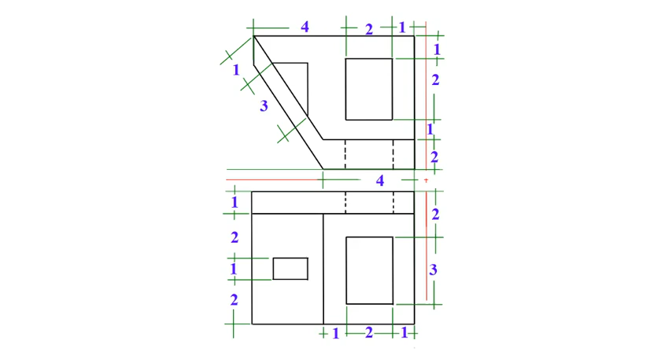Welcome back, class. Today, I'll show you exactly how to take a set of orthographic views and convert them into a 3D isometric drawing. We'll use a box method with coordinate transfer, a clear, step-by-step process that works for any object, simple or complex. By the end, you'll see how each 2D view contributes to building a complete 3D visualization.

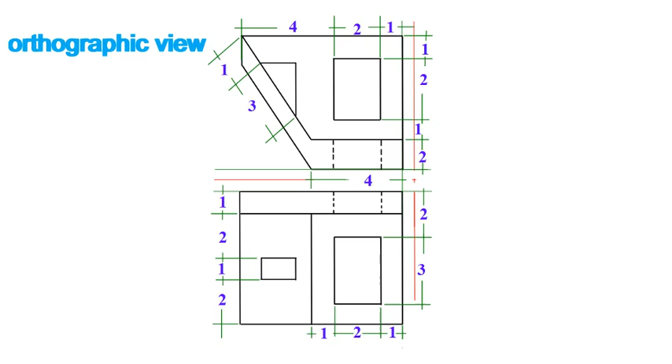When we begin the process of converting orthographic views into an isometric drawing, the very first step is to carefully study the given views. Remember, orthographic drawings are like a map. They provide us with all the information we need to construct a three-dimensional object, but in a flat, two-dimensional form. The front view gives us the height and the width, and it often shows us the slopes or inclinations of the surfaces. The top view gives us the length, depth, and the width. These two views together contain enough information to let us imagine the full 3D shape.

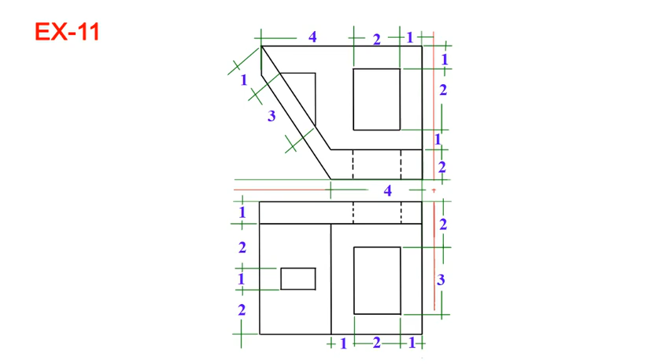In many cases, a third view, like the side view, might also be included, but for our particular example, the front and top views are sufficient. We do not need the third view, because the dimensions are already fully defined.

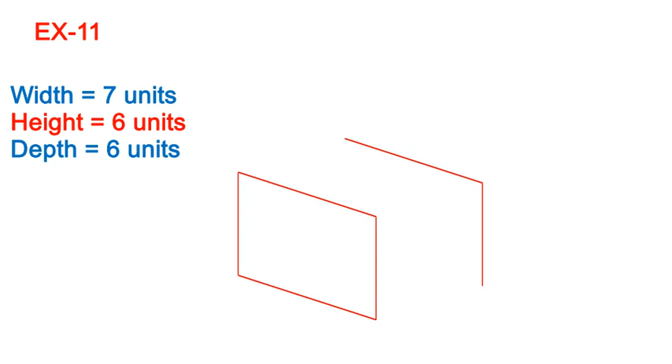In our case, the box dimensions are: width equals 7 units, height equals 6 units, depth, or length, equals 6 units. By drawing this box in isometric view, we set the limits for the object. Every other line and feature of the model will fall inside this box, so once the box is correctly drawn, the rest of the drawing becomes much easier.

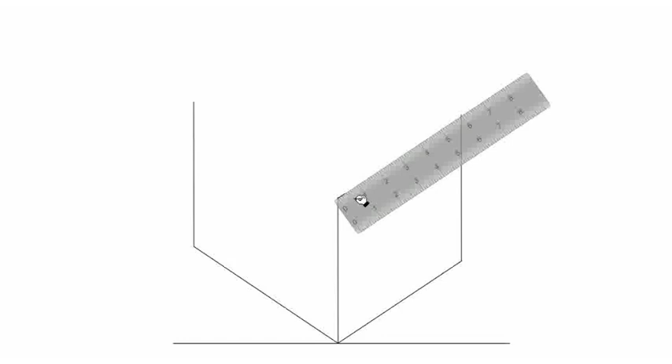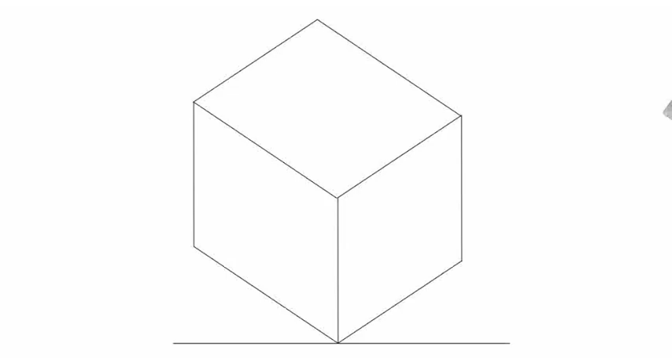A vertical line for height, a right-hand line at 30 degrees for length or depth, and a left-hand line at 30 degrees for width, since this side faces us. Every measurement will be projected along one of these three directions. This gives us the illusion of 3D on paper.

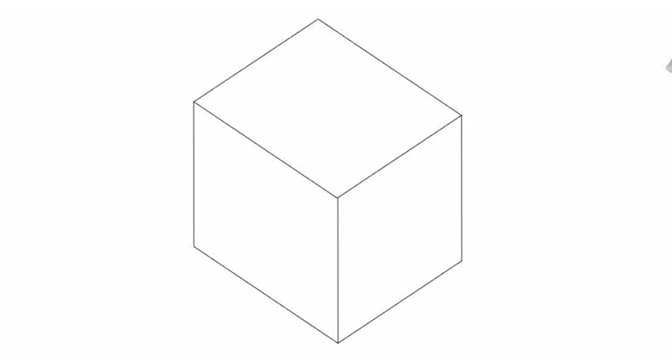Let's carefully build the object inside the box, step by step. We always start by looking at the orthographic views, because they tell us exactly how high, wide, and deep each part is. Begin with the top and front view. In this view, we see a base rectangle measuring 2 units by 5 units. Next to it, on the side, there is another rectangle measuring 1 unit in width by 6 units in height. These two shapes form the foundation of our model.

Create the base first. Draw the 2 times 5 rectangle and the 1 times 6 rectangle side by side in the right side view before extrusion.

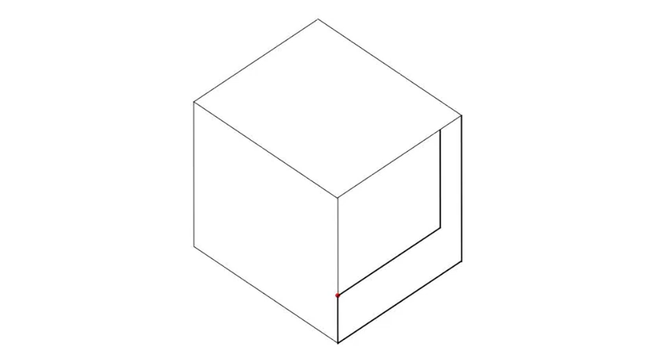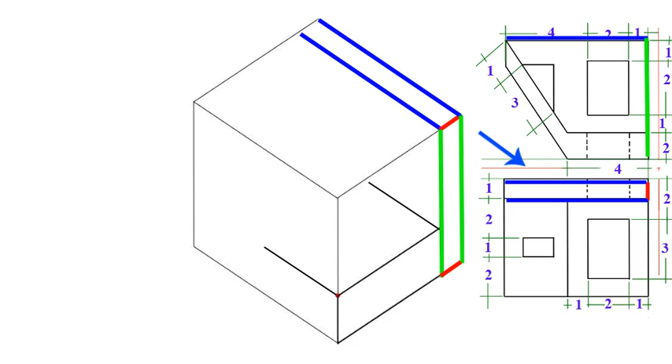Extrude the shapes according to the top view. The 2 times 5 rectangle is extruded to a depth of 4 units. The 1 times 6 rectangle is extruded all the way to the end, as shown in the top view. By comparing the front and top views together, we know exactly how far each portion should extend. This way, we gradually carve the object inside the box, starting from the lower block and then building the step at the back.

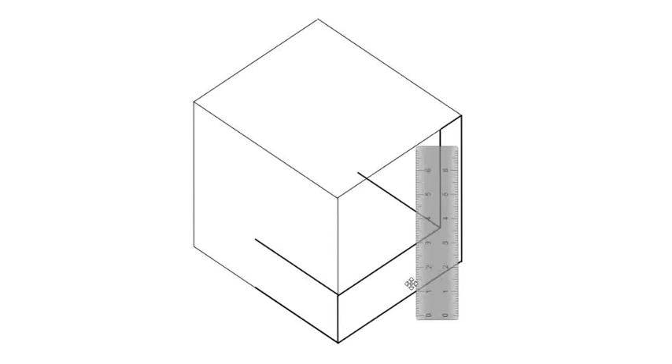To construct the slope, first pay attention to its endpoints. From the front view, the slope begins at a depth of 7 units measured from the right side view, which places it on the left edge of the front view. From there, the slope line drops down until it meets the upper left corner of the 4 times 2 rectangle that appears in the front view.

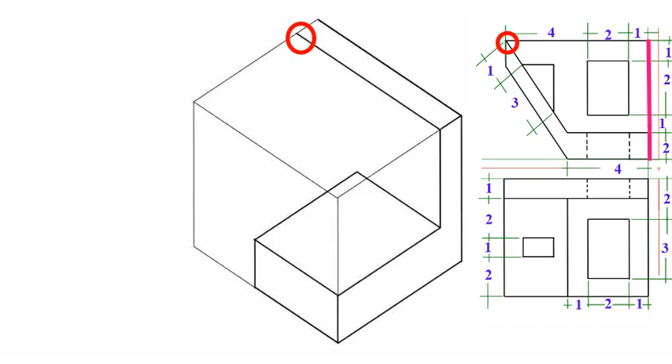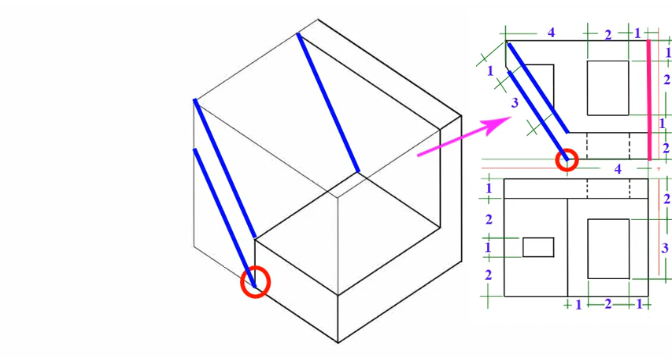The opposite boundary of this sloping surface is less direct. Its lower edge starts from the bottom corner of the same 4 times 2 rectangle and then rises upward, as we can clearly see in the front view. The extrusion length of this sloping plate is not determined in the front view. It must be taken from the top view. Once you read that depth from the top view, you can extend the slope backward. With these references, sketch.

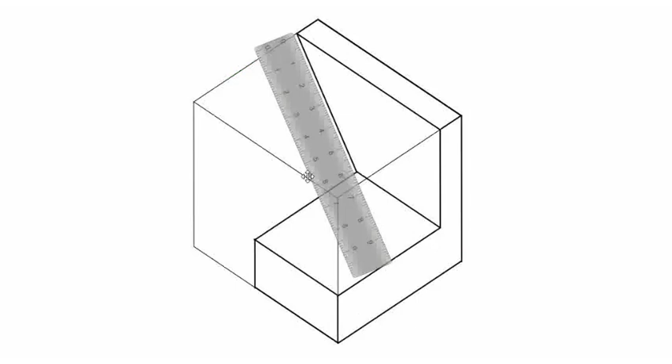The sloping surface according to the given information, carefully linking the front and top views so that the 3D form is accurate. Next step, adding the square holes correctly. Adding the 1 square and 1 rectangle hole.

1 rectangle hole on the top surface of the base plate, and another square hole on the front face of the plate. Remember, in isometric drawing, every line from the orthographic views is directly transferred onto the isometric planes. This is why we carefully measure from the given orthographic views before we draw anything.

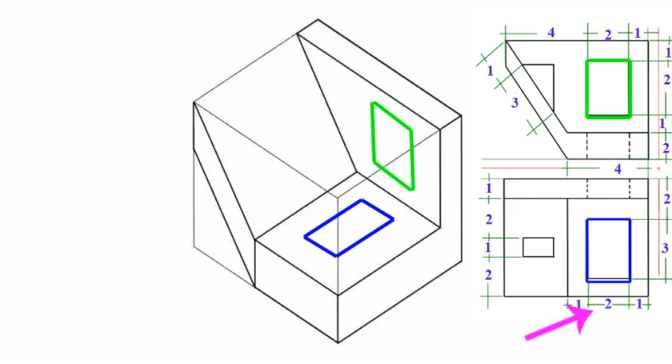The orthographic drawing tells us the hole on the top surface of the base plate is a 3 unit by 2 unit rectangle from the top view, and it's 2 units depth from the front side view. To construct this hole in isometric view: first, the hole is at the center of its square, so you must measure 1 unit to the right from the front side plane, and mark it slightly.

And measure 1 unit to the left from the right side plane. Always keep your construction lines light. Only darken the final visible edges of the hole after confirming its location. This completes the hole on the top surface.

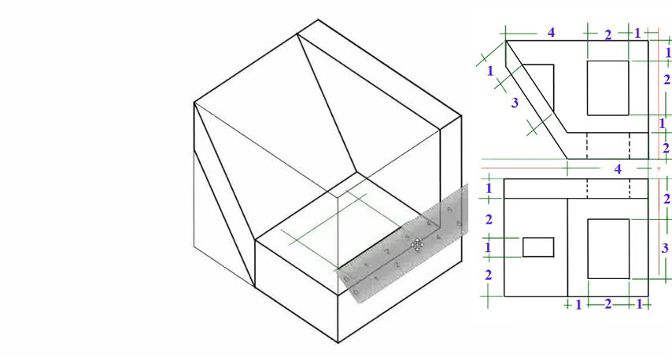Drop vertical lines downward to represent the depth of the hole. The depth from the front view is given as 2 units.

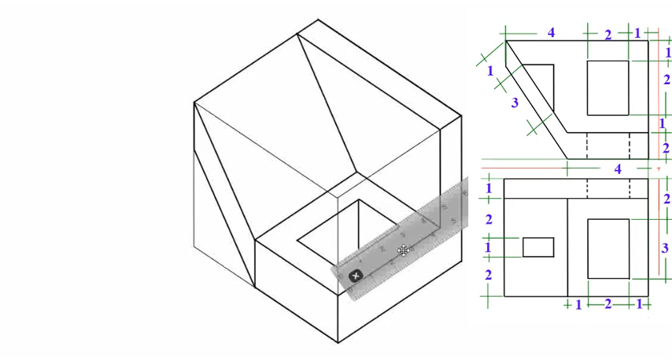Let's work on the hole in the front face. The orthographic drawing shows that the hole is a square of size 2 units times 2 units. Similarly with the base plate, it is centered but shifted slightly. The hole can be drawn after measuring 1 unit to the left from the right side plane, and 1 unit down from the top plane to position it correctly.

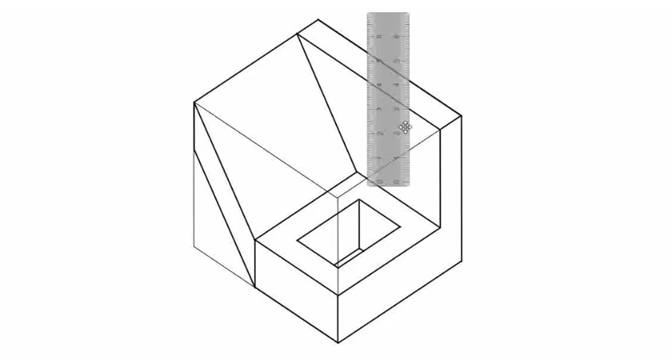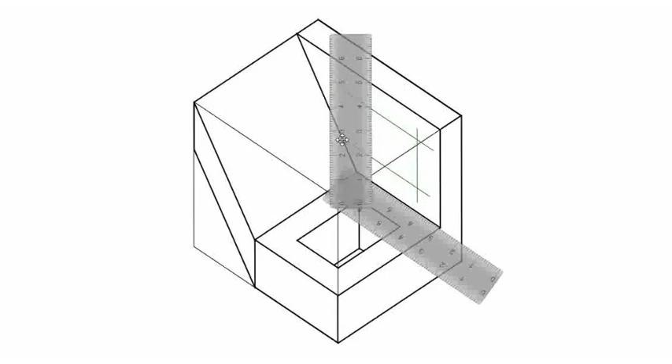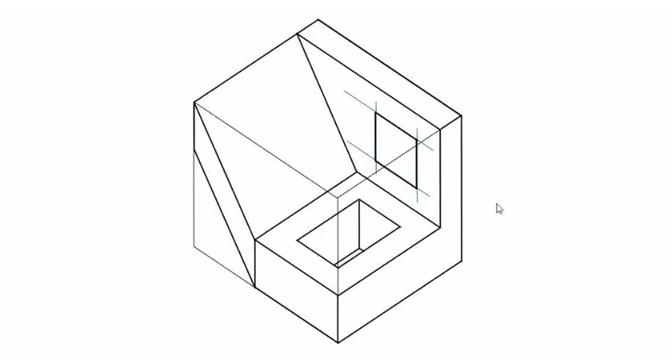Two unit by 2 unit square hole on the front side plane from the front view, and depth is 1 unit from the top view. So mark this carefully. When drawing holes or recesses in isometric, it's important to combine information from both the front and top views. One view gives us the position, the other gives us the depth.

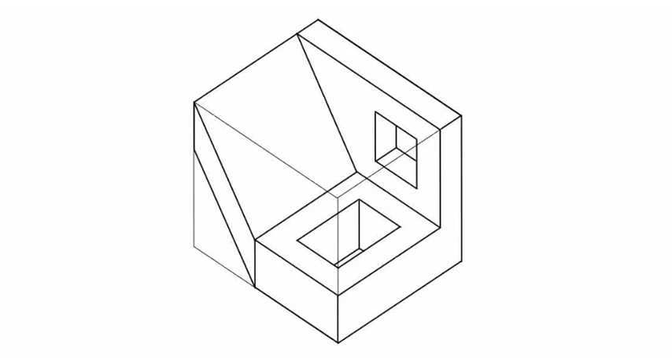The final detail is the triangle, whose hypotenuse lies on the inclined plane. Its length is 3 units as shown in the front view, but it begins 1 unit down from the upper edge of the slope. To construct this, imagine the slope having its own local coordinate system, aligned with its edges. The thickness that extends into the depth is 1 unit, which can be confirmed from the top view. This method, measuring directly along the edges of the inclined plane, is the key to accurately placing features on sloped surfaces.

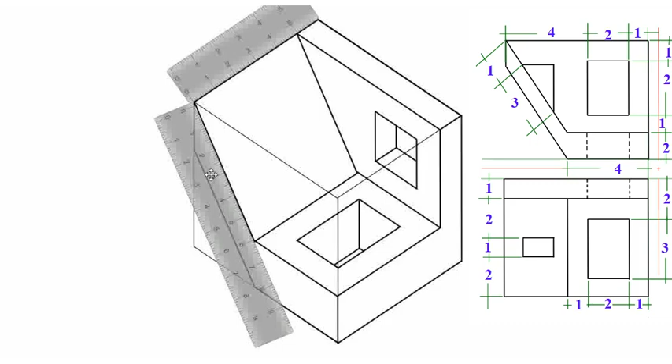Now we have the reference point for the triangle, where its hypotenuse is parallel to the inclined plane. The remaining sides to draw are the adjacent and opposite edges. To construct these, extend a vertical line along the z-axis and a horizontal line along the x-axis from the rectangle's corners.

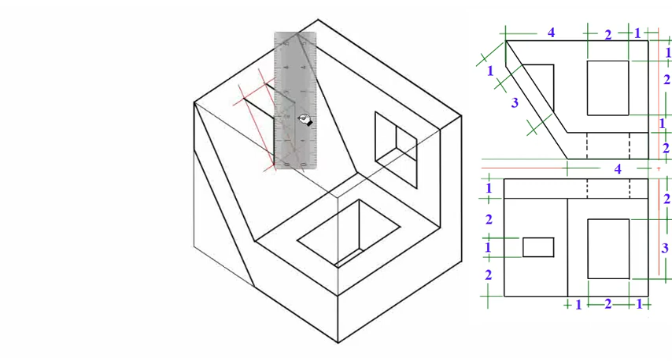Erase all construction lines and thicken only the visible edges. Remember, never use dashed hidden lines in isometric drawings. Those are only for orthographic views. Your final sketch should be clear and easy to read at a glance.

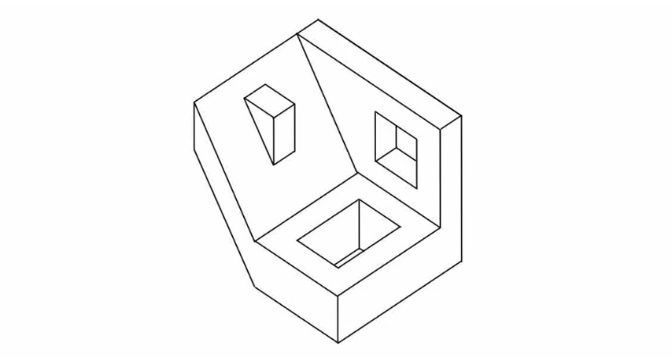Now, double-check your drawing. Do all the edges from the top view appear correctly on the top faces? Do the heights align with the front view? Does the slope connect precisely between the given points? If all three match, your isometric drawing is accurate.

That's the workflow. Set up the axes, draw the bounding box, block out the main shape, add the slope, then cut the details. Always move from general to specific, from large forms to small features. With consistent practice, you'll be able to transform any orthographic view into a clean and accurate isometric sketch.